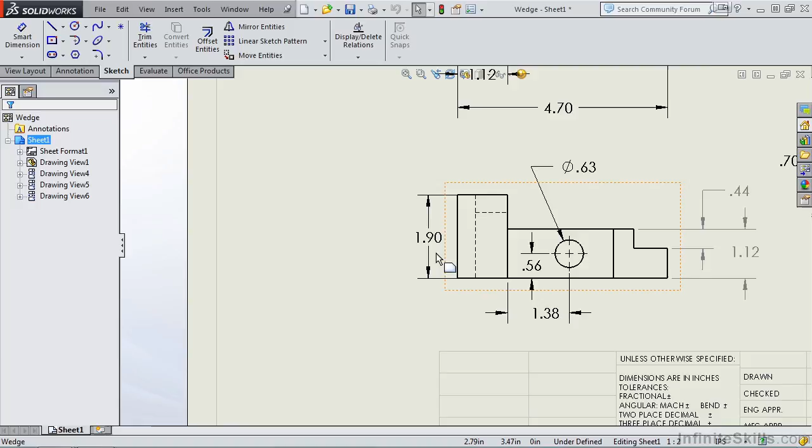Now what we're going to look at is how do we format these dimensions. The formatting applies to both driving and driven dimensions. So let's get started. Let's zoom up on this 1.90 dimension, and we'll select the dimension. The property manager opens for this dimension, and notice, like we talked about before, we have the availability of a tolerance. So let's try this out.

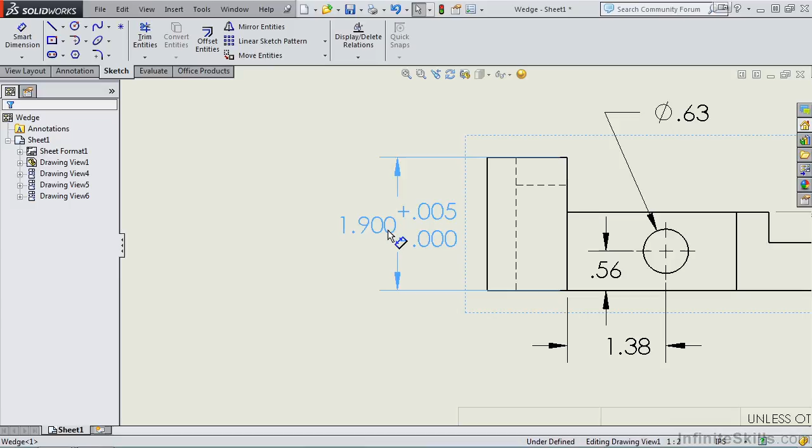Instead of having none for tolerance, let's select bilateral. Bilateral is plus minus. I am going to enter a value of plus 5 thousandths minus 0. In order for this to display and not round off, I need to change the precision to 3 places. I'll go ahead and close out of the property manager and then move this dimension out a little bit so it displays correctly and it's not on top of the view.

I select another dimension and we scroll down the property manager. I want to show you that we can add other symbols. In fact, we have all of our common drafting symbols here: diameter, and notice the output on the screen, degrees, plus minus, center line, and more. Now notice we do have a more button. There's a lot of information here.

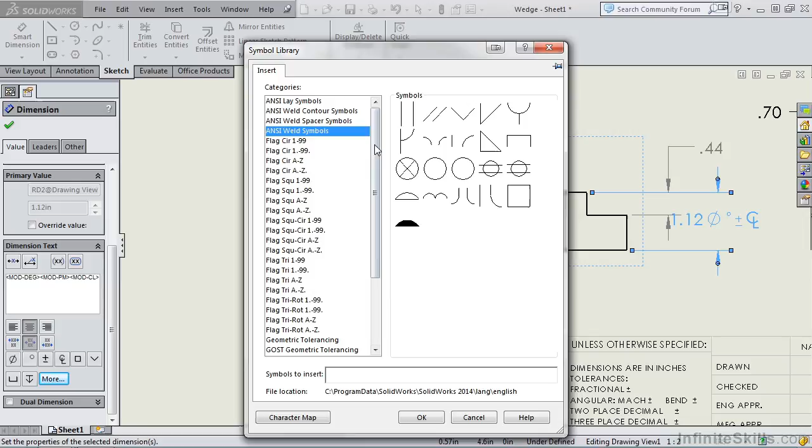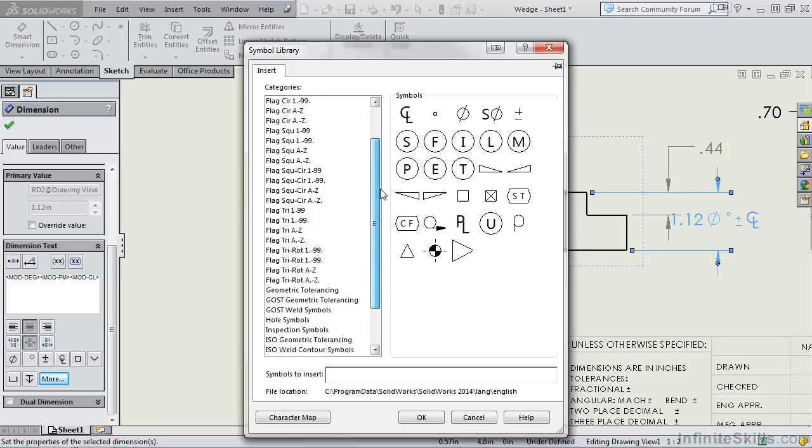You have your lay symbols, weld symbols. Scroll down, we have different flags. We have circular flags, square flags, all with numbers and alphabet. We have flags which are triangular in shape. And then we have a lot of the GD&T symbols. We have hole symbols. So you can see, pretty much any symbol you're looking for, you're most likely going to find it in this dialog box.

Right below this, and at the very bottom of the property manager, we have dual dimensioning. Now let me go ahead and delete what I placed in this earlier. So it returns it to 1.12. Let's make this a dual dimension. I am going to check this.

And one last thing before we conclude this lesson, you may have noticed this little graphic pop up as we were moving dimensions in the earlier lessons. But if I select a dimension, notice we have this little graphic pop up here. This is for the dimension palette. Very handy feature. When you move your cursor above it, notice this window appears.

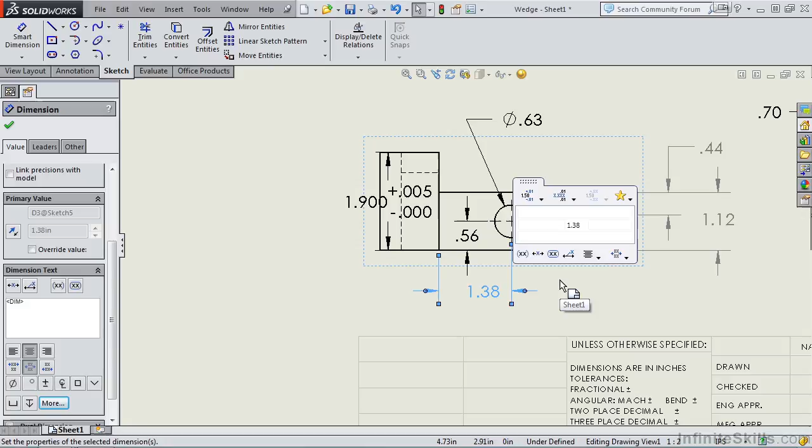This allows you to change the tolerance type. It allows you to change the precision, add prefixes, suffixes, make the dimension a reference dimension, an inspection dimension, and so on. So this is a fairly handy window that once you use it a few times, you will find yourself using it on a regular basis.

So one thing that you should know about formatting of dimensions: if there is a certain type of format you need, it is available. It's just a matter of getting into the property manager, moving through the different windows, and finding that option.